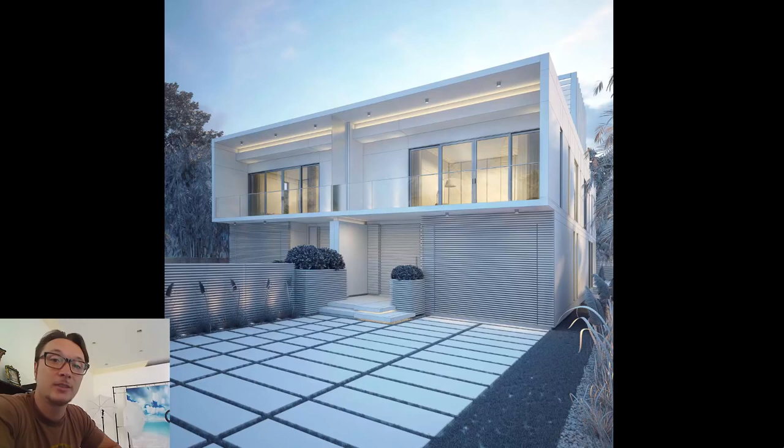As you can see here, I have a nice simple house that we can do our tests on. No textures, no nothing, just balancing the lighting, and not even having all that vegetation here, because this is obviously going to slow our render.

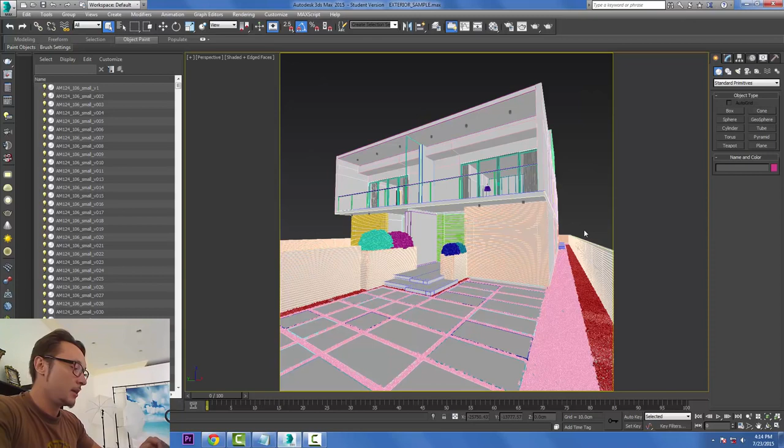The first thing is, of course, I want to go and put a camera, a really well positioned camera. So we can put it somewhere here. As you can see, all the stuff full of grass - you don't really need to model everything unless you see it. So I just added some detail on that side of the house because this is the render that I'm going to go for.

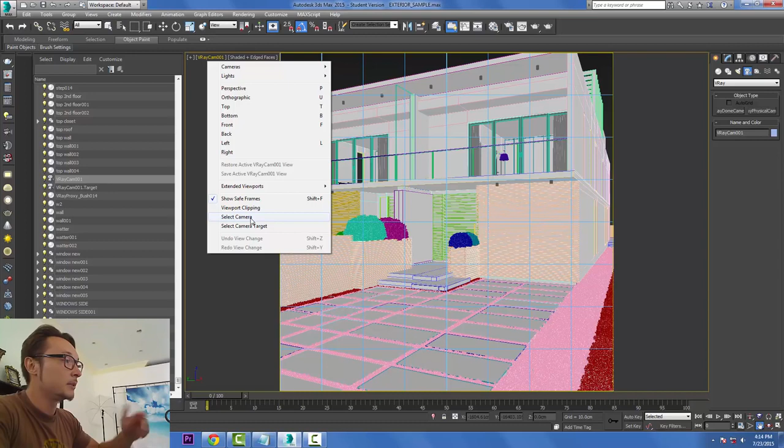As you see here, this angle doesn't really match. I mean, I'm standing inside, but the property is pretty small. So what I'm going to do is select my camera and go with a little bit wider angle, so I'm going to go about 28. That's about the right one. I usually test 35 - if 35 is okay, I go with it. But for my purpose, maybe 30, something like that would work good.

Another thing to do, maybe I can zoom in a little bit so I'll have less of that foreground. What I want is to get a nice perspective look, a nice kind of stretchy look, but not too exaggerated. We can use some helpers here on the VRay physical camera in order to get that effect right.

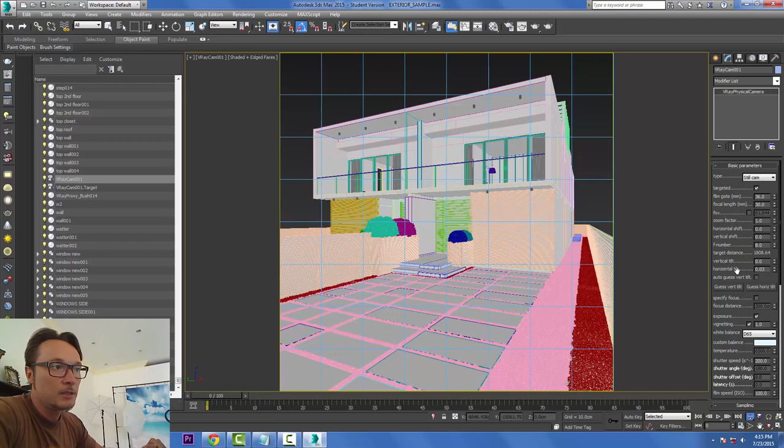I want to get also a little bit of a side of my building, so I'm using horizontal tilt right here just to get - as you can see, I'm kind of tilting and shifting all my houses, getting into the right perspective, with things in the foreground coming a little bit further to us and things in the background going a little bit further away.

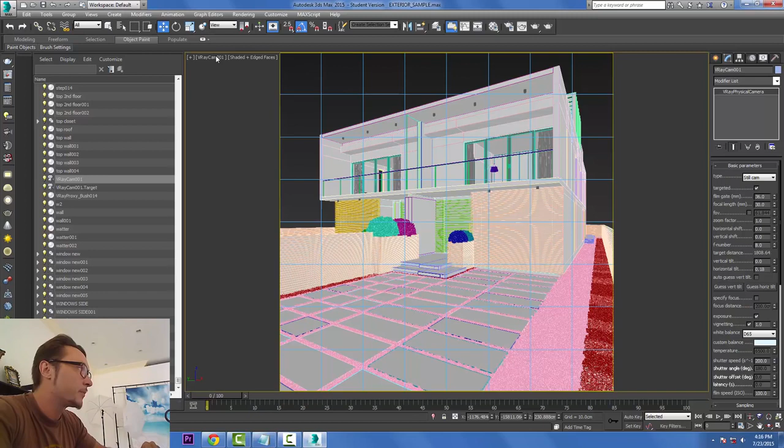Now I want to get a little bit better balanced composition somewhere here. So I'm going to select my target and pull it up a little bit so I'll get a little bit more sky and less ground. Now, as you can see, all my building got also tilted, so in order to fix that I need to use vertical tilt.

I'm doing it manually - I could let the computer guess it, but I like to do it manually just because I don't really like really straight lines, so I get a more organic look by going maybe 1 point up or 1 point down.

Another thing I can do, as you can see, I'm leaving everything by default so far, not really changing anything, but we can also do a little bit of distortion on the camera. That's a little bit too much, but somewhere around a slight distortion point - 1.6, now that's too much - 0.1, just a little bit, just slightly, so the sides will get a little bit curved.

It's more for the feeling and less for the look. We can also do all those effects in post-production, which is much more advisable because you can go back and forth. But for this example, I just want to show you that those options exist.

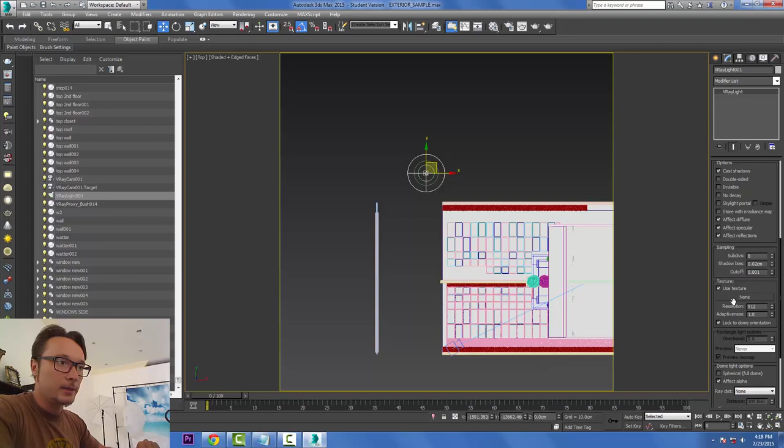Okay, so the light was added. Now we need to go and add the map - we're going to use an HDRI map. It's right here, VRay HDRI. Open my editor slot and drag and drop this guy right here. We're going to use instance, and go select our map.

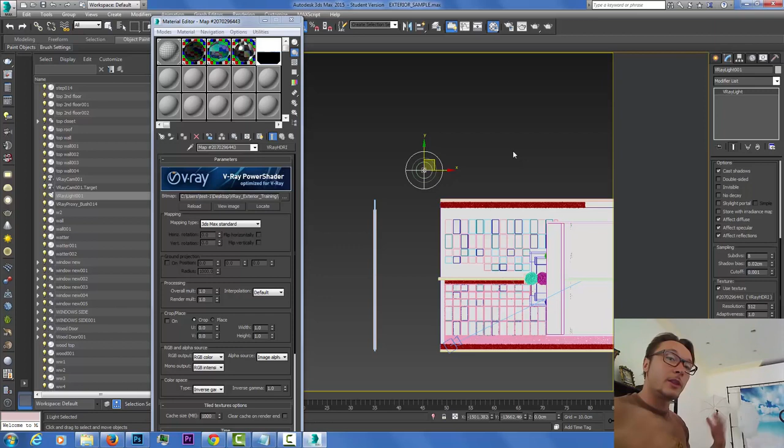As you can see, I'm using Peter Guthrie maps, but you can go check out HDRI Hub - they have a lot of cool maps, all for free. Or just type free HDRI map on Google and you can find a lot of maps. The thing here is to get a good HDRI map that has enough pixel depth to throw enough lighting, so it also will create shadows. And in order to enhance shadows later, we're going to add VRay Sun.

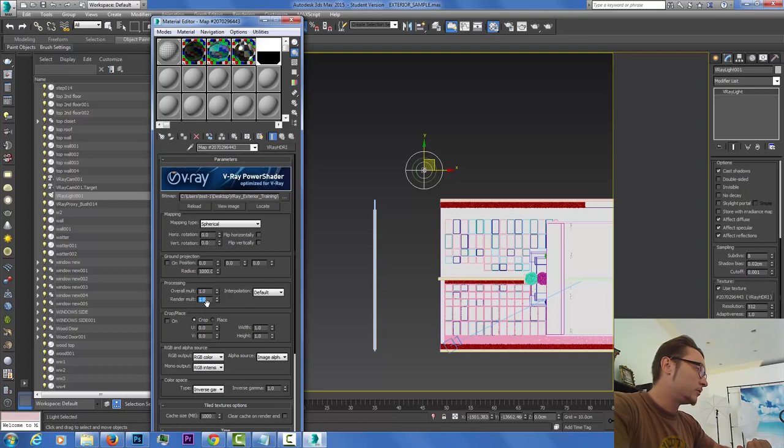It's very important to have a really good HDRI map as a start. So we loaded our HDRI map, and now we need to put it on spherical mode. Those are multipliers of processing and overall render multipliers, we're going to touch them a little bit later.

But as now on the spherical mode, very important, we want to go and try and do some tests. First test render, see how this stuff goes, how this looks. So nothing fancy.

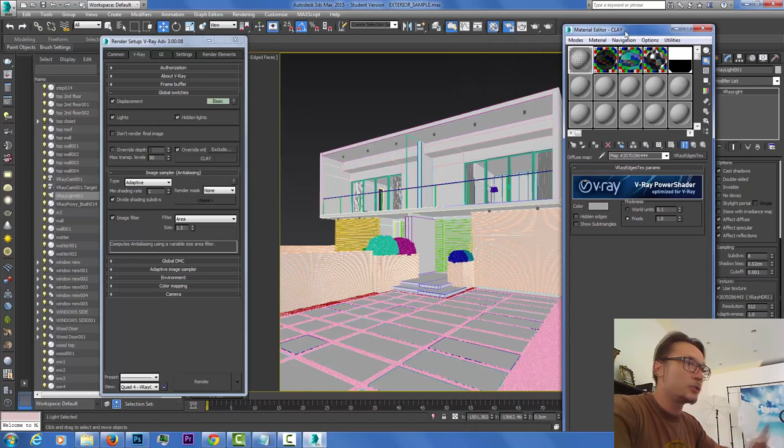1200, save your map as a test. On global switches, we're going to use the multi-texture, the clay texture. As you can see, it's almost white but not pure white, and I like adding edge texture and giving it a little bit of a grayish look. That way we'll have nice defined lines of geometry, so we can see geometry better, and things going through stuff you'll be able to see too. Sometimes just the clay material won't show you those, so that's also a cool trick.

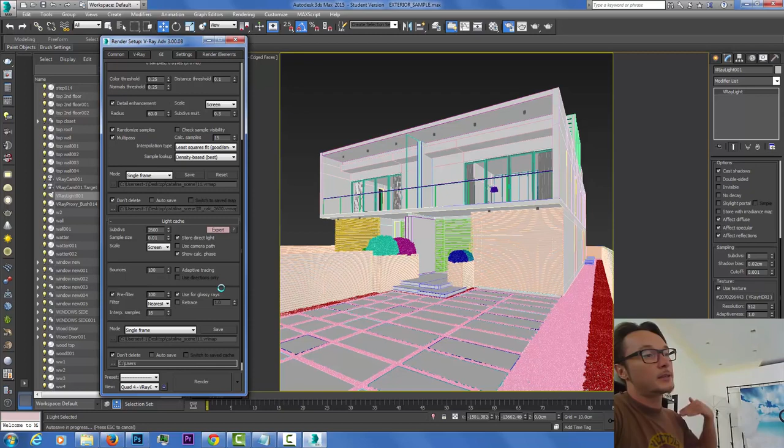On the global DMC, 0.006 to go faster, and the adaptive image sampler. Pretty basic stuff, this is maybe a little bit too much. But just remember that the trick of this stage is to move as fast as possible to get results as fast as possible, because you want to see how your lighting responds after changing multipliers, and getting fast feedback is the key for moving really fast in this stage.

All right, so let's see what we got here. I'm gonna click C and go to my render and render my camera. I'm not using any vegetation because that stuff will just slow my render. I also should probably hide the grass and the stones because those aren't really adding anything. But in some cases they can indicate how good the ambient light, the ambient occlusion light, the secondary bouncing of the lights is. On flat objects it's hard to see, only where the objects connect, where the shadows get all collected together. This is the best spot to see this.

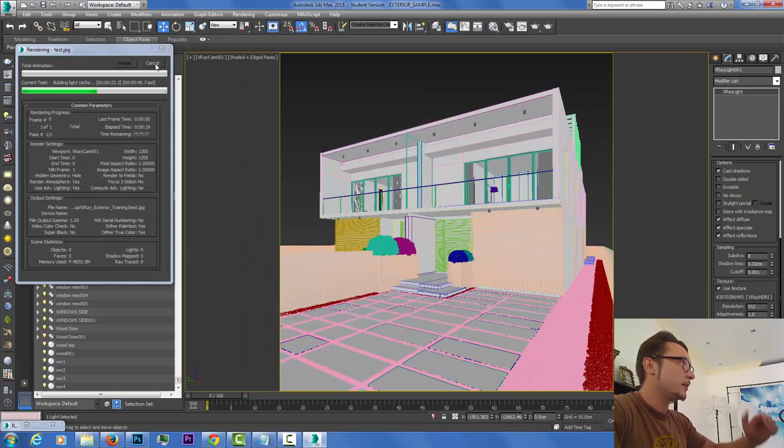All right, so we can see that we're getting pretty good shadows here. I mean, not enough light - the light is kind of standing behind the house. So what I want to do is rotate it a little bit more to the side, clockwise.

So I'm gonna go to our HDRI map, and for the horizontal rotation we're gonna put 50, so this map is going to rotate more to the side.

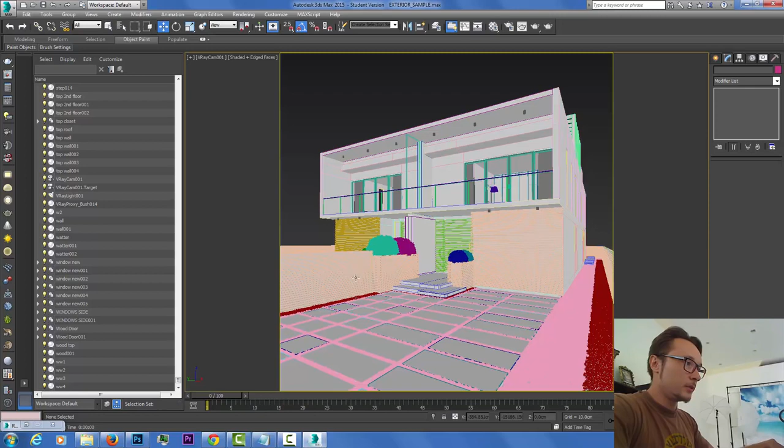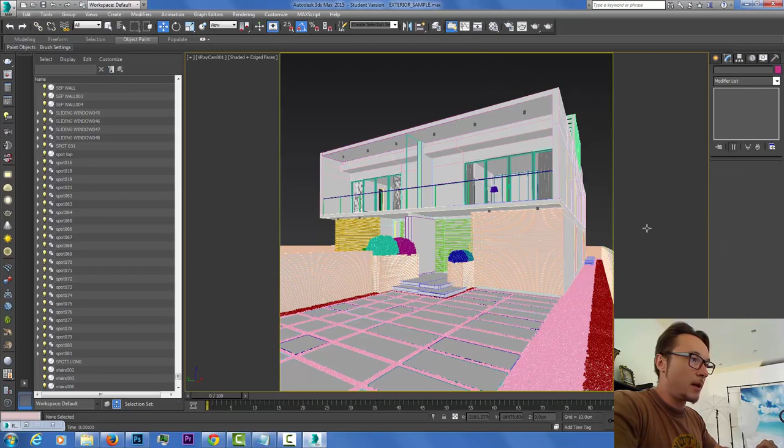What we can do is maybe just leave one object, Control Q, and do some renders here, see how this stuff goes. So I'm selecting now the position of my HDRI map. Right now it's standing directly behind the house, so I want to get it a little bit more to the side. This is pretty good - we can see it's throwing more light on the back of my building, on the right side. So I'm gonna stick to that. You can keep rotating your map and finding better angles for it, but for the sake of this example I'm just gonna stick to that and move on to adjusting my camera.

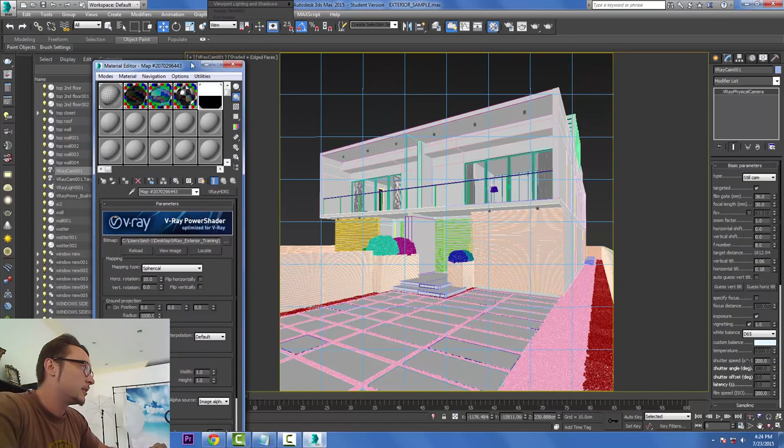What I'm gonna do is make it a little bit lighter, so I'm gonna go higher with my ISO, put 200 here. And I'm leaving everything else by default. In interiors we use f4, but for these I'm gonna leave it as is, because for exteriors, if you go shoot real photography, you're probably gonna be around f11, f13 if you have a DSLR camera. So practice it, it will give you really good heads up on what's going on.

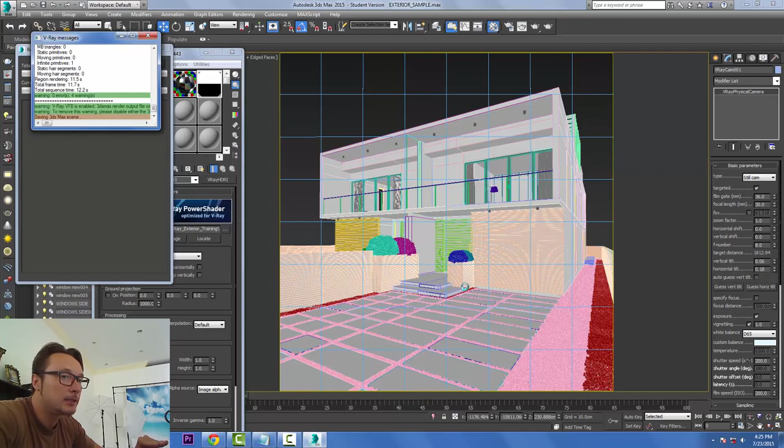All right, so now let's render and see how this guy goes. It's very important to throw enough ambient light into the scene, and of course if you throw too much it will overtake your VRay sun, so it needs to be balanced. It's a secondary lighting, so it always comes as a second intensity for the shadows and everything - the sun will be the first. But generally speaking, I'm getting nice results here.

I'm getting more on the side - this side is not lit, so my map's pretty balanced here. However, I'm getting this black line, which is a horizon line that can be fixed by adding a VRay plane, so we'll cover the whole area with the plane. But generally speaking, this is a good way to go.

Let's add a VRay plane and add a VRay sun and see how this stuff works. So now I'm gonna add VRay plane right here, and I'm gonna go and add VRay sun right here.

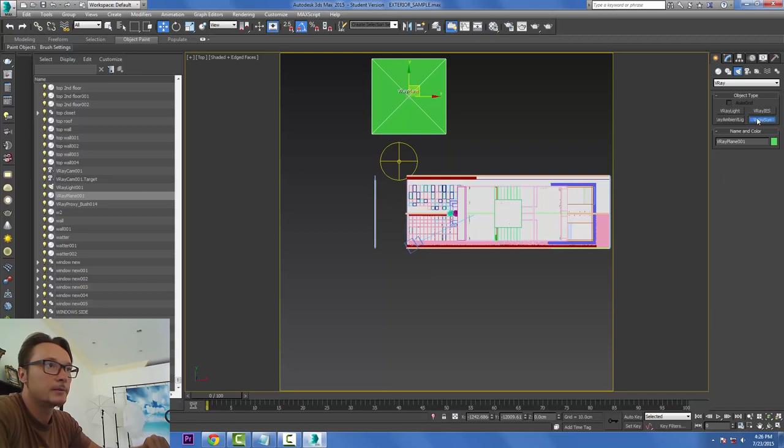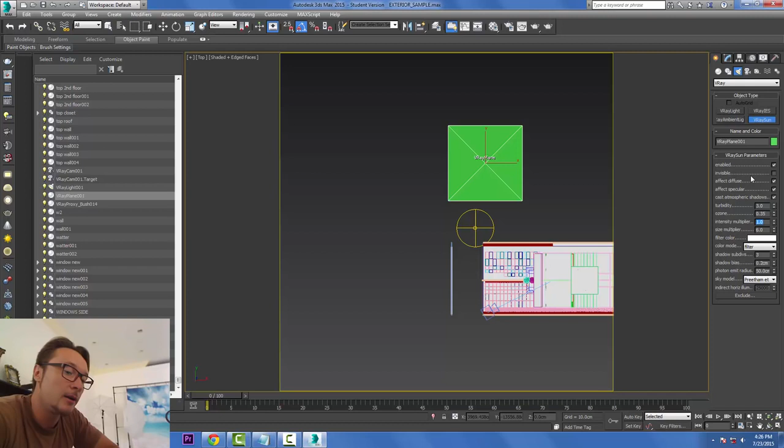Even before I add VRay sun, I know I'm going to get very harsh cast shadows, so I'm going to do the size multiplier. How big is the sun? I want really nice soft shadows, so I'm going to put it on 6, 5, 6, 10. The higher you go, the softer shadows you get. For the intensity multiplier, I'll probably put 0.1, because naturally my sun will be really strong and I don't want it to overexpose the image with the VRay sky in the scene.

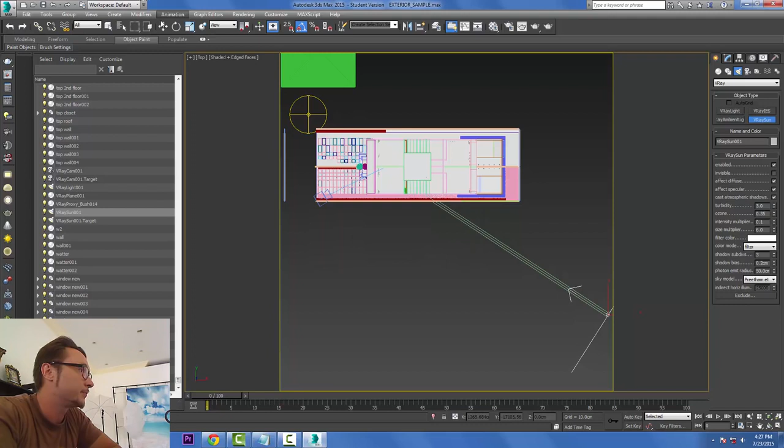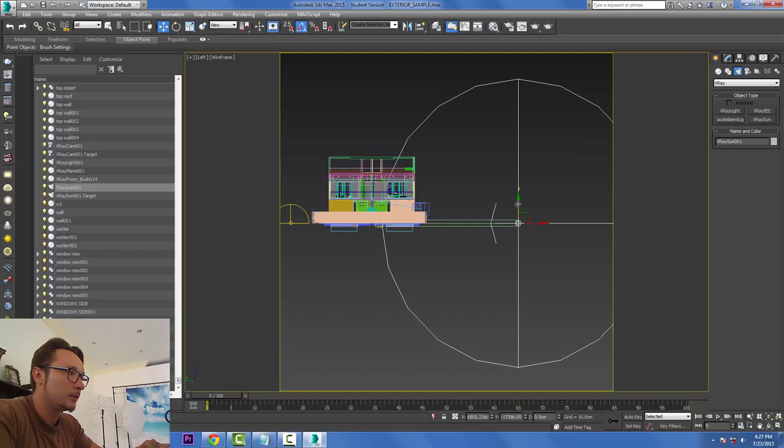So this is what we're going to do, we'll click yes. Maybe I'll get some longer shadows here, so I'm going to pull it somewhere here, somewhere around here, and extend it a little bit more behind, somewhere here, and go a little higher, something like this. Yeah, I guess that's good enough.

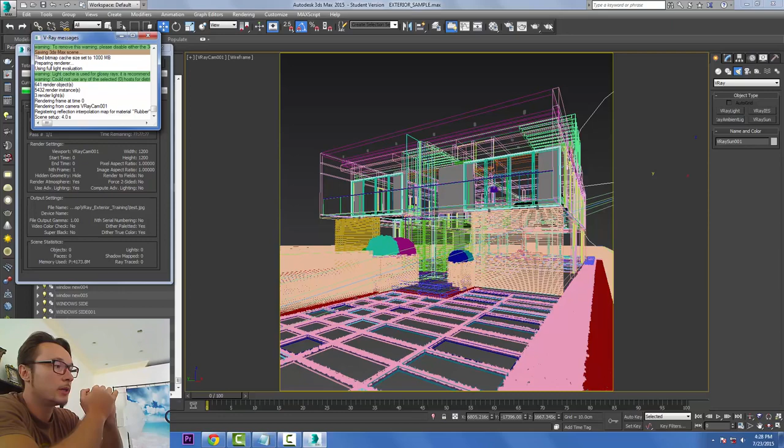All right, so now let's make a test render, see how these work. After balancing that, we can go and start adjusting our interior lights and exclude all the glass objects, of course, so we can see through. That's another feature of VRay. And level 1, of course, you're going to have all the glass, water, everything translucent, you want to have it out of your image.

All right, so we're getting very low presence of the sun, almost none, so we're going to increase the intensity multiplier, maybe put 0.5, see how this works, because we still want some of the sun hitting this side of the building in a much better way.

Alright, so here it is. We're getting this nice defined line of the sun, which is pretty good. So we get one side lit and one side in the shade. Maybe we can increase the multiplier a bit more, to go somewhere about maybe 8. And do the test render, see how these would go.

Alright, so the sun looks good, getting nice exposure here, it's pretty good. One side lit, one side in the shade. Now we even get some nice shadow here from the sun, which is also pretty cool. Now we can go and adjust the sun position to match it a little bit better, because we don't want any mismatch.

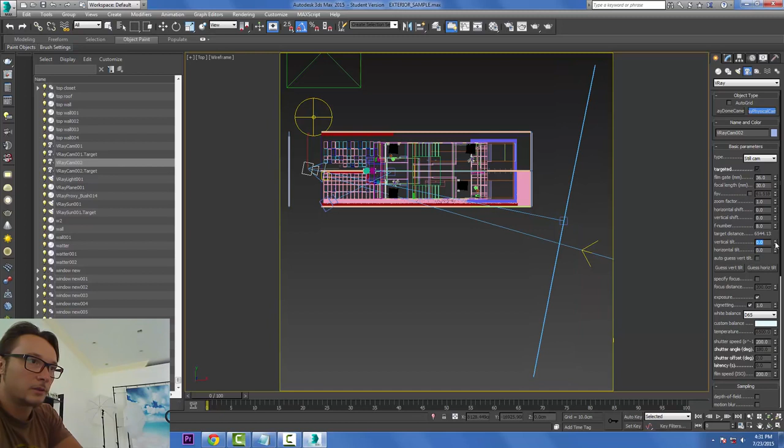So what we're going to do is create another camera and point it towards the sun. I'm going to select and put another camera, and remove all those horizontal and vertical shifts that we did. Go into the ISO, select the sun, and together with that camera actually get my sun to match my HDRI map. So this is the sun. Camera 2, target. We're going to put it more frontal with the HDRI, so something like this. This will give us a good understanding of where the sun is compared to the map's location.

And now we can do another render. So this is the location for the sun. And now if we take this guy to the environment map, this is another thing that I do - just drag and drop. I'm going to make a copy to the material slot and make it an instance, so we can change the settings and this will not affect my light map.

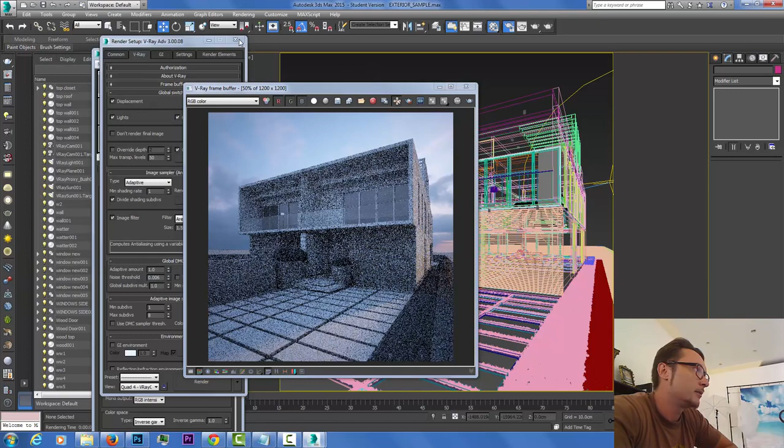Now I can go inside my rooms and start placing lights here, maybe some lights at the entrance. As you can see, I have some spots, I can use IES lights. So the trick here is to start adding lights one by one - that means you can add a light to one room. Oops, that's a dome, let's make it plane.

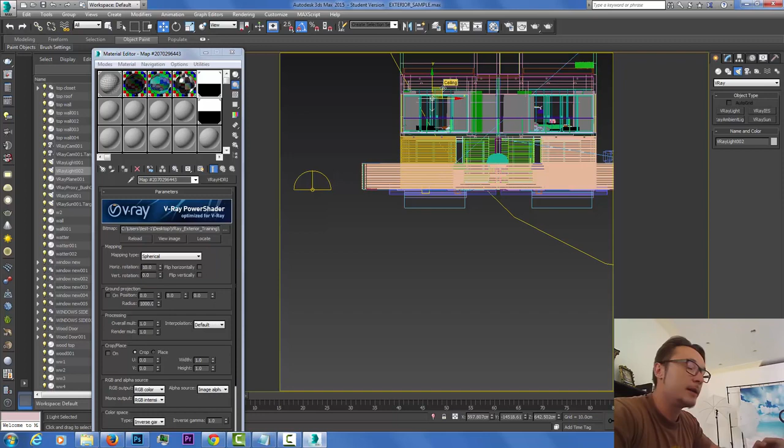Adjust it, maybe clone it, and then start adding light to another room. Then you can start adding lights to your landscaping and garden. By doing that, you should probably hide and unhide different lights.

After you set it up, you can hide it so that you can concentrate better on the intensity of that light. So for my example, let's put 10. Because 1 is probably gonna be very low, and we're gonna give a little bit of an orange, yellowish kind of color to it, like that.

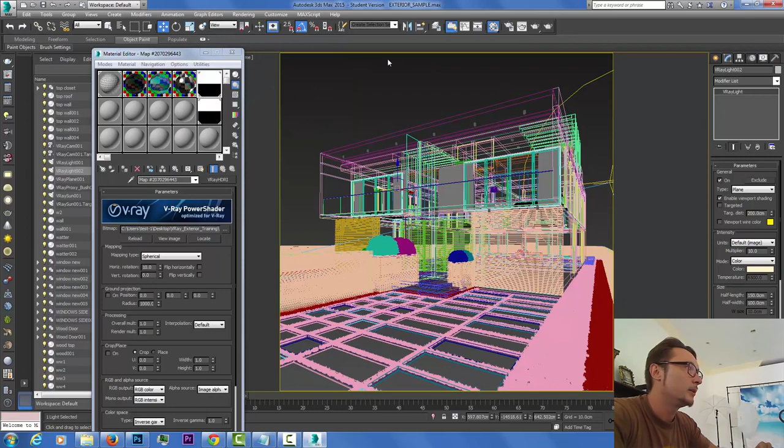In order to save time, we can do some region renders, so we don't actually render the whole image, because the whole image already has the right setup. So we just go inside those regions and let them render and see how they work. Something like this.

As you can see, I'm also not rendering the whole image till the end. I'm just using pre-calculation of light cache. This way I can really move forward, really kind of gallop between my stages and not be drifting on the spot.

So this is a little bit too low right here. What I'm gonna do is increase this light and give it a little bit higher. All right, this is pretty good. Renders fast, pretty clean render also.

My option here, follow the mouse - whatever I'm positioning my mouse, this is where it's gonna render. That's nice. I don't want to get my room too exposed. I can kind of fix it later, but generally speaking, this is a nice amount of light.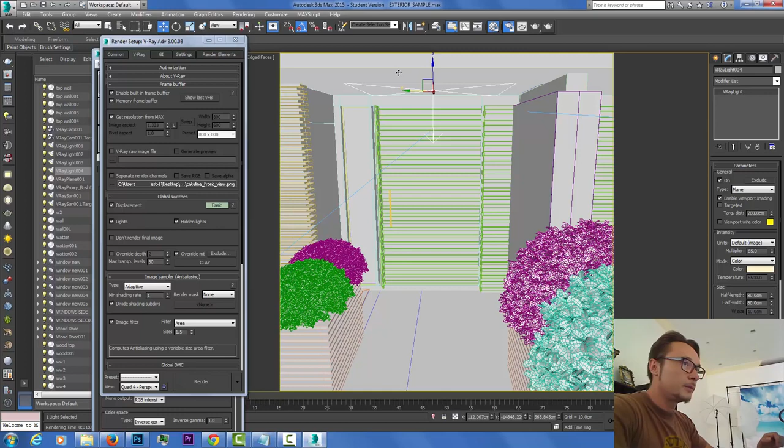Maybe it's a little bit too big, so I'm gonna make it 80, kind of square looking. Lower it down. We're gonna do the regions here also. Before you render the entire image, make sure your regions are good. So this is the region that I'm gonna render.

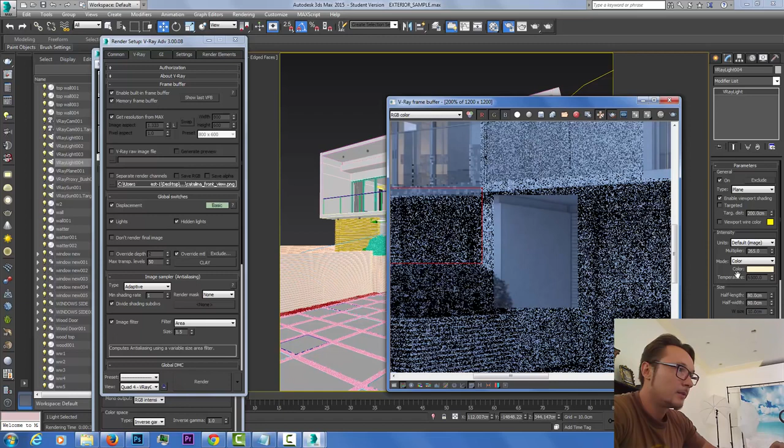Oops, we're actually not rendering the right part. So I'm gonna take that back, because obviously the exterior light's gonna have way more exposure than the interior lights. The minute you take your light outside, it just throws more light everywhere. And the interior lights, they've been blocked by the glass, so the light there is a little bit more diluted.

So let's see how this works. Oh, that's a lot of light right there. Nice and soft, which is pretty good.

After doing this, we can take it and duplicate it, put it on the other side, which is fine. Make a copy, and maybe change the light a little bit. The tonality here needs to be a little bit orange. Maybe to have a little bit more exposure.

Let's put like 75. Okay, so that's it, another render of that area.

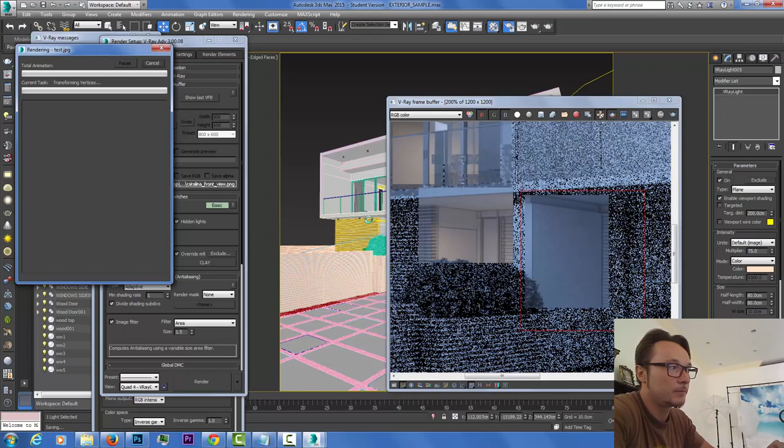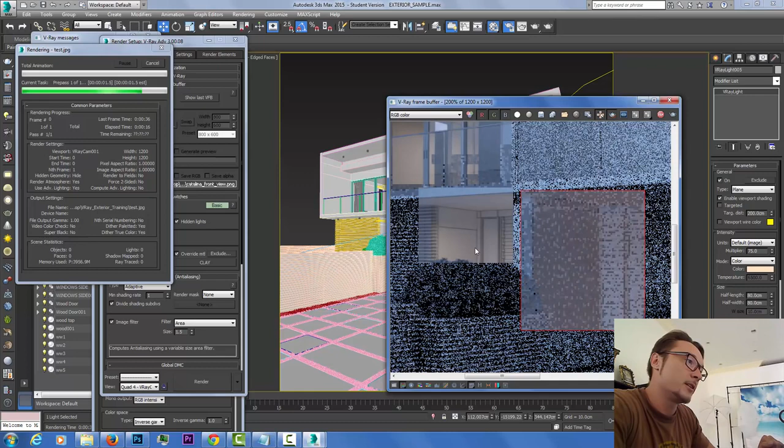After that, we can move on to our landscaping. For the landscaping, I'm probably gonna use IES lights. There is a big library of 30 IES lights that I share with all my students in my trainings. You can also probably, if you Google it or try to download it, you can find it. I don't remember where I got it, it was so long ago, but most professional 3D artists use that library of 30 IES lights.

Alright, so now we're getting nice and soft illumination here also, a little bit different from this one, which is good, because we don't really want to have the same tonality of lights everywhere - it's never the same. It's always got these changes, but generally speaking, this is going a really good direction.

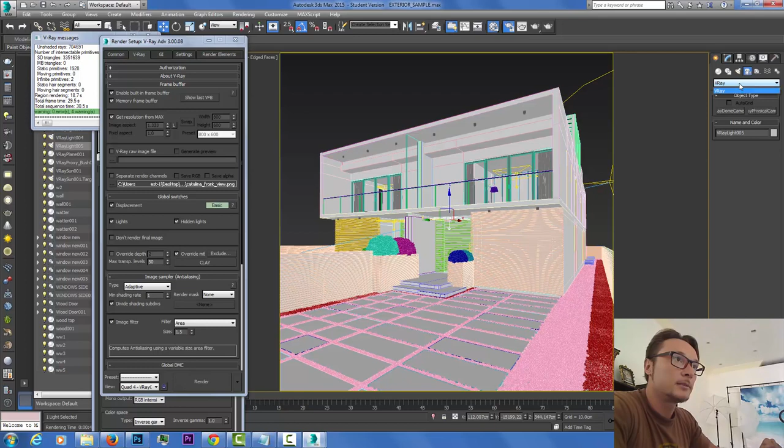All right, now we can go and add some IES lights and test them. VRay IES right here, I'm gonna click T. With the target - we don't need the target. Just gonna bring the target back and kind of F, Z, pull the target up.

I'm just gonna cancel it.

If you're having difficulty selecting the lights, just go on the lights here. You'll be able to work with your lights, move them up and down. And if we go and select the IES file, we've got a lot of different IES here. Let's try this, number 12.

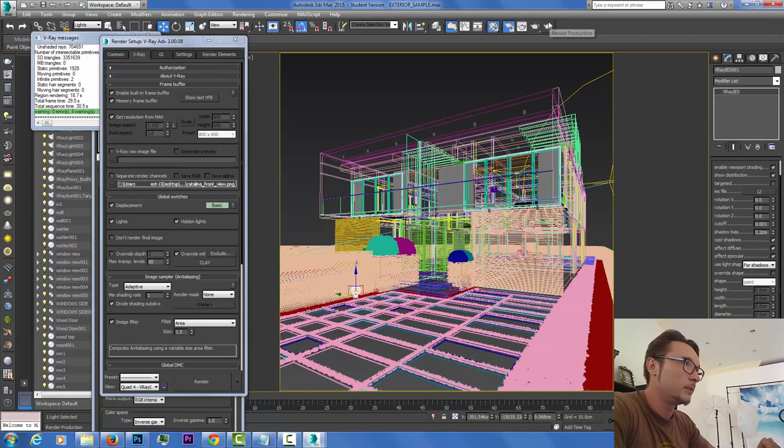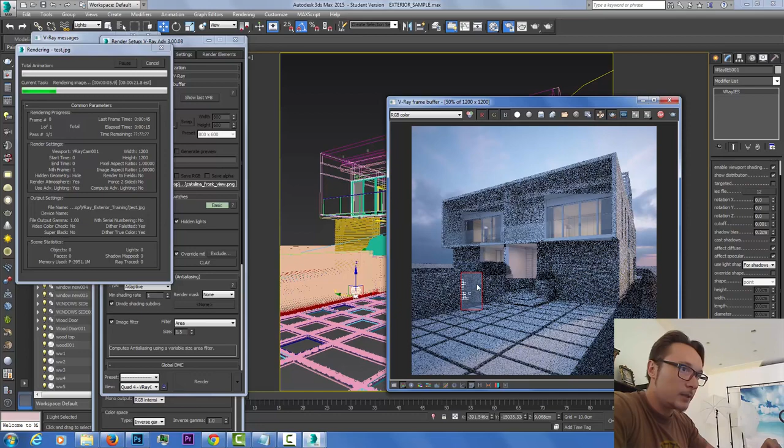See? We can just remove the target because we don't really need it. Go right here on the side, click render, region again. Let's see where the light's at. We don't really get much of this guy. We see a little bit here.

Alright, so when you work with IES lights and they throw a lot of different shadows here and there, it kind of becomes more like designing with light and shadow, because they have this cool aspect of getting really clear and defined shadows on the objects.

So after adding all the landscape architecture and everything, you get to work with it a little bit more. Let's go higher with our exposure, if we overexpose it, we can always go down. And for color, I like actually giving it like an orange kind of color.

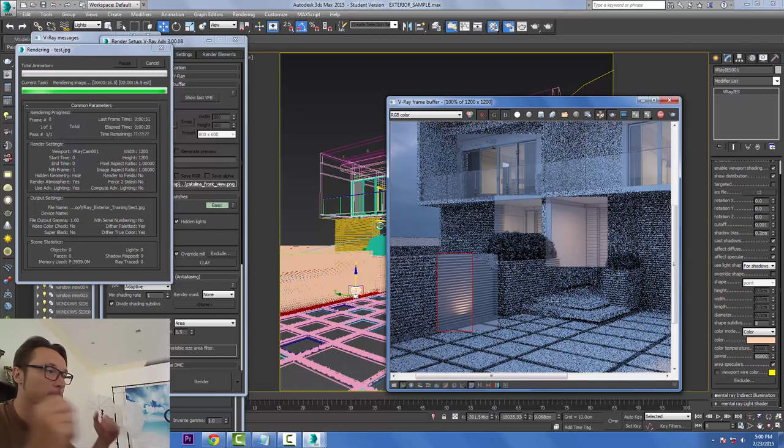The human eye looks for that fake detail. It kind of happens naturally when you open a 3D image and it's really photorealistic. It's just because it's full of detail and your eye cannot stop on one thing and say, oh, it's not perfect. Your eye is just scanning the whole place, going in and out, seeing a lot of things, a lot of imperfections. If you have similar things one to another, you don't get much realism because it all looks fake. So try to get that variety of things.

All right, so we've got our light, which is pretty good, and I kind of like it. So what can we do now? We can take this guy and we can duplicate it. Let's go like this, and 1, 2, 3, 4, 5, 6.

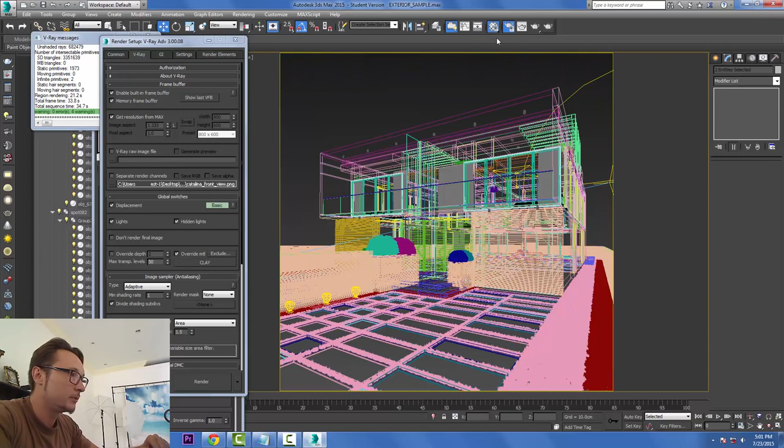That kind of covered the whole garden here, pretty good. And if we go and see our last frame buffer, and we render this whole area here, you don't really need to have a lot of variety. It's just the variety that needs to be in the rooms, in the spaces. This is where you get stuff to be a little bit different. But when it comes to the IES lights, they're pretty much the same.

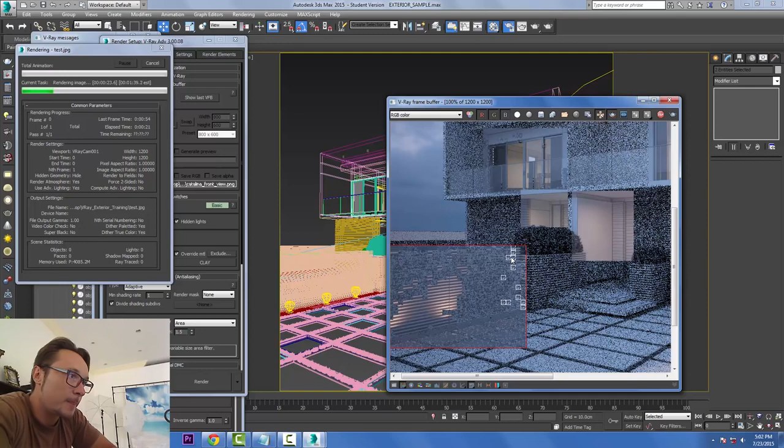So I would just duplicate them with the instance option and not use the regular copy. All right, so here we go. We get a nice shadow here, we get dark areas, we get nice separation between the lights. I like that triangle here, which is working pretty good. I think that's the way to go.

After that, I can also add some lights under the stairs here, which could be really cool. I can add lights on top of this. So generally speaking, this is a really cool model to test your things out.

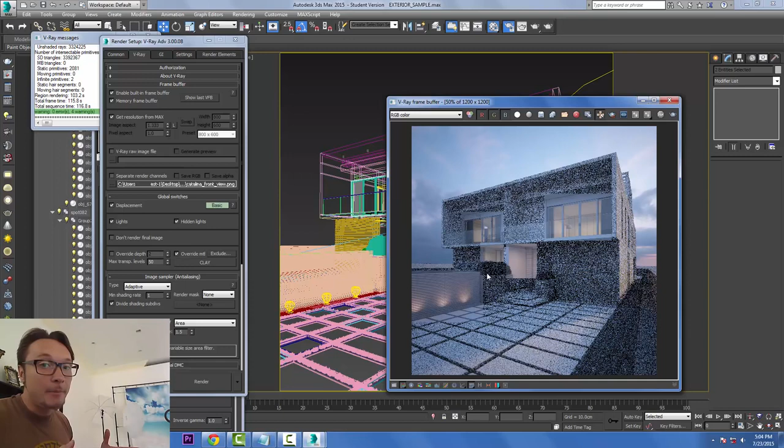You don't really change the camera after you move to level 2, so this is the right stage to find your camera. I can put one camera here, and I can put another camera, maybe make it a little bit more frontal, just because I already worked with it.

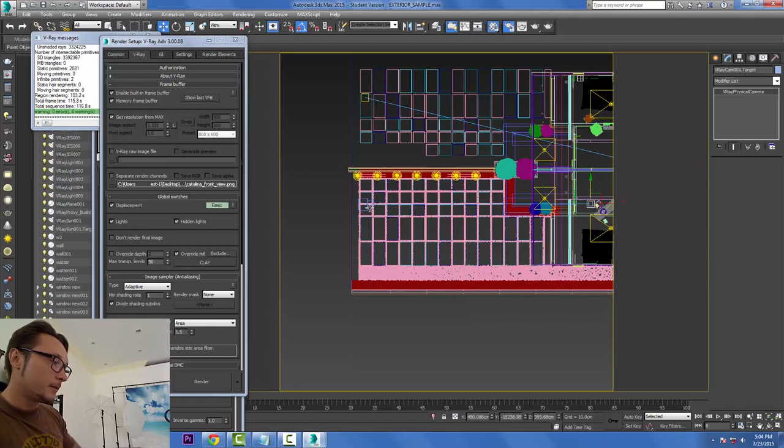I just need to reset the vertical and horizontal shifts. Just maybe the horizontal, and leave the vertical. Let's see how these guys work here. Right here, it's pretty good. I'm getting an enough balanced composition of space.

Maybe I'm standing a little bit too high, so I'm gonna go lower. People are not usually that high. So something like this would be a little bit more realistic and looking maybe a little bit up to the sky. And again, we need to find better numbers for the vertical tilt.

So let's make it a little bit more interesting. I'll put 0.077 just to give it a little bit more organic look. All right, let's see our frame buffer.

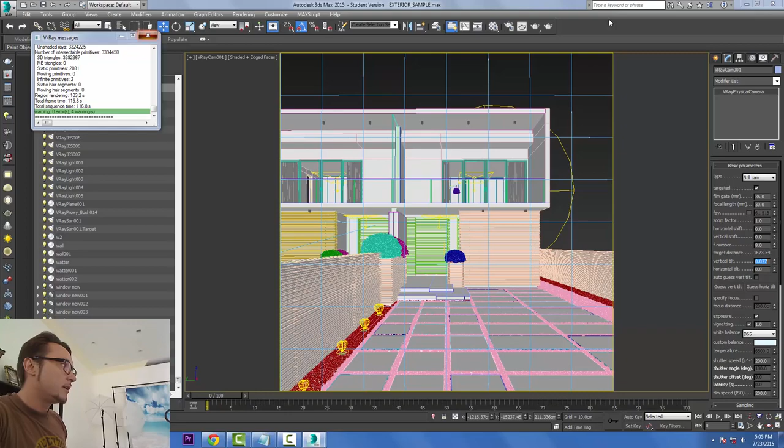I'm gonna go out from the regions and render it. So you can render, get your images, get your cameras. It's not always you can find the perfect combination for all the cameras.

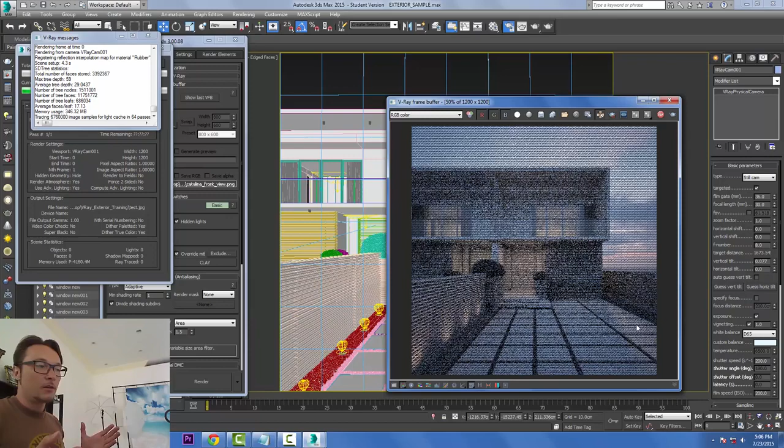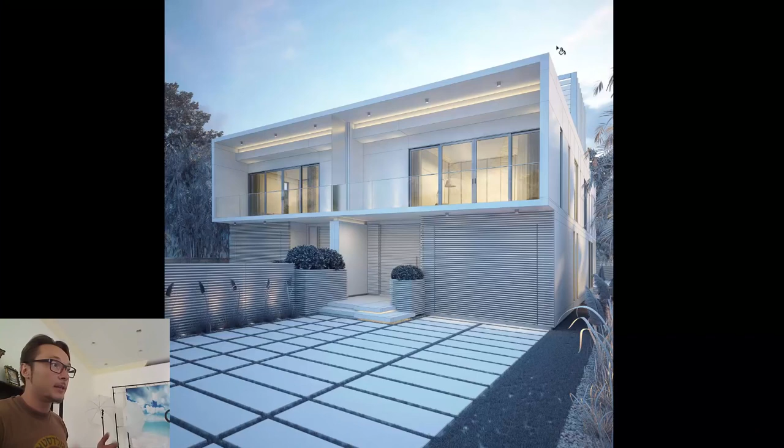Right now I'm rendering the front angle, and for the front angle this looks good. If I switch to the back angle, it might not look as good as it looks on the front angle. But generally speaking, when this scene gets more vegetation and more objects added to it, it will look much more alive and much cooler.

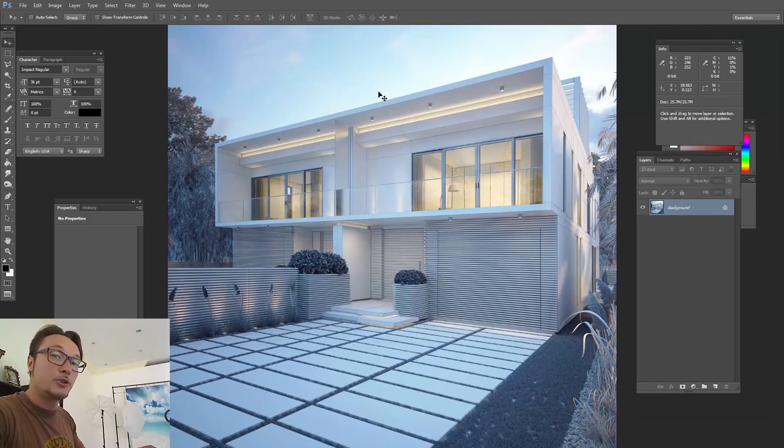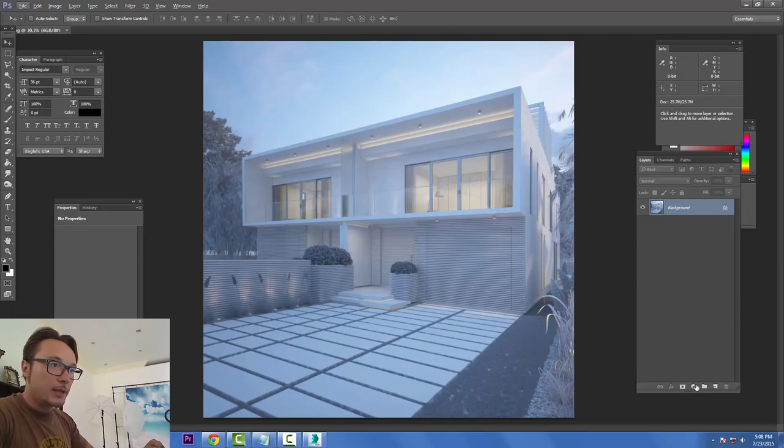Before I go, let me show you another cool trick to get your images really well done. All right, so this is my raw render per se, and you can see it's a little bit overwashed. So let me show you some cool techniques that will help you get the right contrast and the right balance, so you will see what way your image is going, if it's the right way you want to go or not, and if there's something you need to increase or decrease.

All right, so the first thing I do is a little curves. I fix my curves just to get a little bit more contrast.

Already better. Then I can do some color balance. I always do that yellowish reddish tones on the midtones, and on the highlights most of the time I'm getting more cyan and blue, and on the shadows I'm getting more dark tones, more bluish, trying to get that look.

I always hide and unhide, so we stay in pretty much the same tonality, but we kind of removed the reddish and got more of a sky look, with nice contrast and nice separation between things. So another thing is to add contrast, and we're gonna use the contrast tool here, something like this.

And now we can do levels, just to get it really nice and right, something like that.

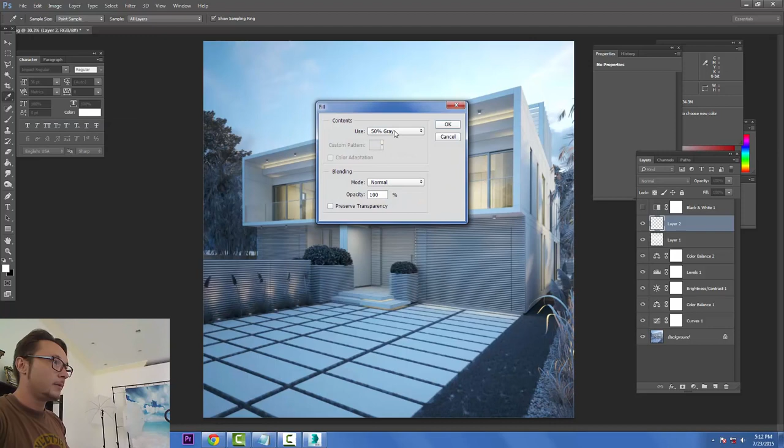As you see, I'm getting a little bit better light, but my stuff here is getting washed out. So I can fix that by filling up my image with 50% gray, pure gray, switching it to overlay mode, and then going to the burning tool and just getting the right detail here, which is pretty cool.

So I've got some layers that throw in light, and on top of them I have some layers that bring the contrast back.

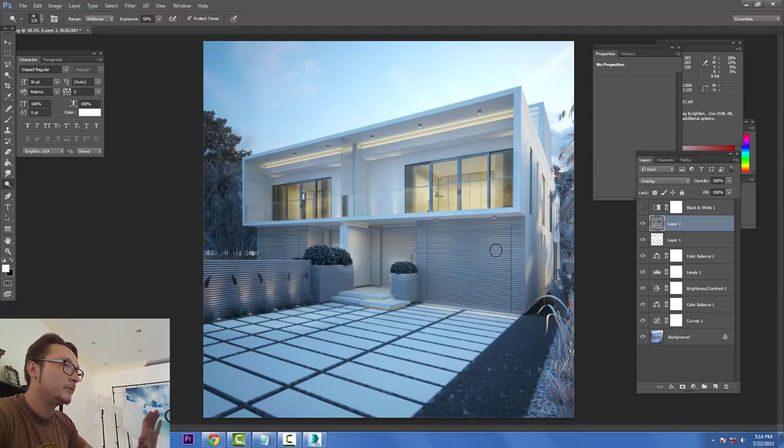So, same thing: you can darken some places, or if you switch to the dodge tool, you can make it lighter if it's too dark. And if the bush is too dark, you can fix that too. But generally speaking, this is how you paint your light and see if your image is going in the right direction or not.

See that? I'm getting much better results and fixing a lot of stuff, and this layer helps me a lot understand the relation between the things in my scene.